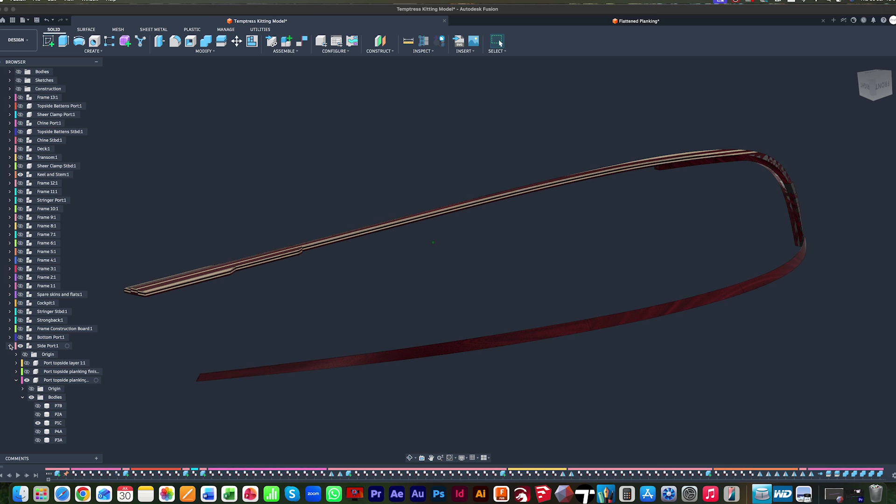We're going to be doing longitudinal planking down the hull sides. We're going to be doing some longitudinal planking on the bottom for the parts that are going to be visible when the waterline is painted. And then we're going to be doing diagonal mahogany planking for the rest of the bottom.

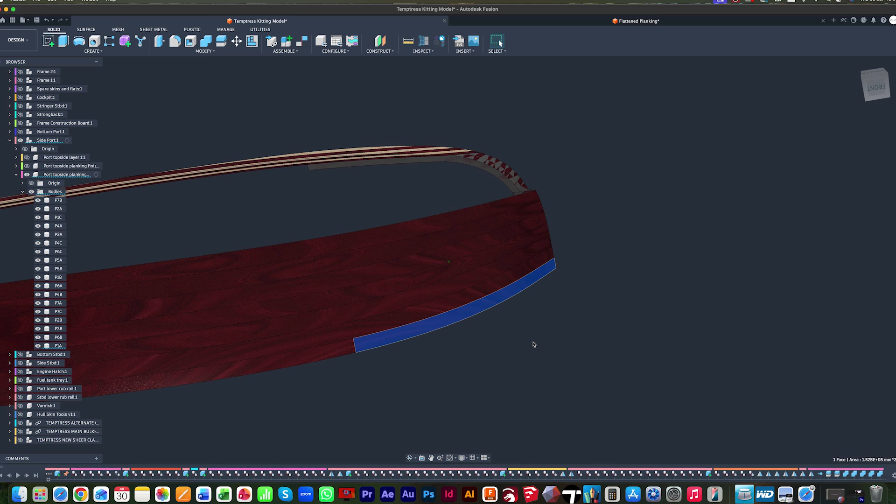Now I've got some ideas for how we can do this process a little bit differently to how you would normally do this. These planks would normally have to be manually patterned and laid out onto boards of stock, then cut to size, which is a very time-consuming process. Given that we have a complete 3D CAD model of this boat and we already have all of the plank arrangement modeled, we may as well utilize that information and try and refine things a little bit going forwards.

And after all, that is what this project is all about. I'm looking to find ways in which we can make modern wooden boat building more efficient. And you've already seen a lot of that rolled out with the pre-shaping of components such as the stem and the framing. So in this video, we're going to take a look at a slightly different way to approach the hull side planking by unwrapping those planks in CAD and forming flat patterns that should give us a pre-cut, ready-sized plank.

Now, I don't actually know how well this process is going to work. I've done unwrapped planks before, but not quite in a fine finished hull side planking like this boat is. So this may well result in quite a lot of wasted wood, but I'm all here for doing R&D and experimenting and trying to look at how things can change for wooden boats going forwards. So let's get into the process. Let's start cutting our first plank and I'll talk you through how I think it might work.

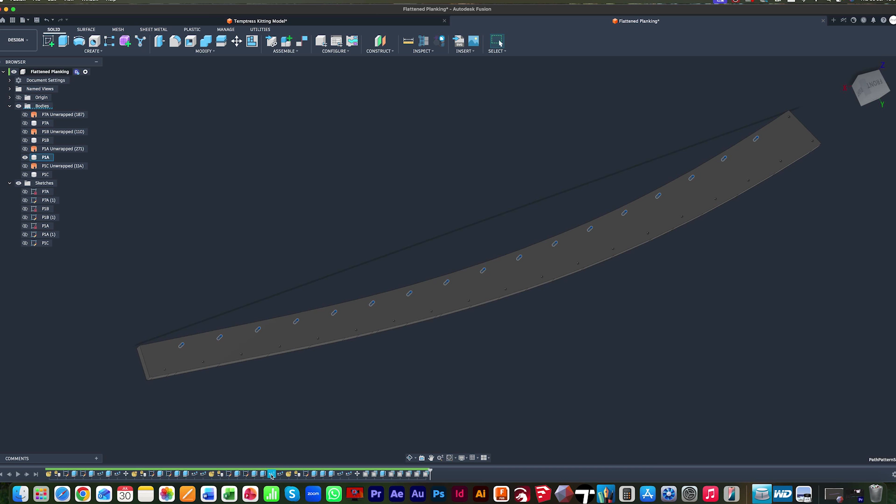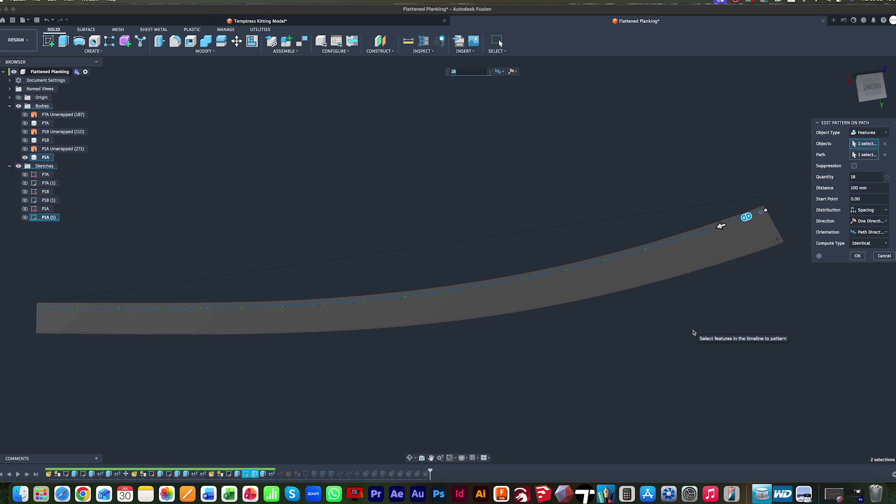If I edit this feature in the timeline, you can see that to place these holes we use a function called pattern on path. So that's going to allow us to repeat something, whether that's a part or a function, along a designated path. In this case, we drill one hole at the end of the plank and then we repeat that along the path, which you can see in blue here. And we create that path by doing an offset from the plank edge.

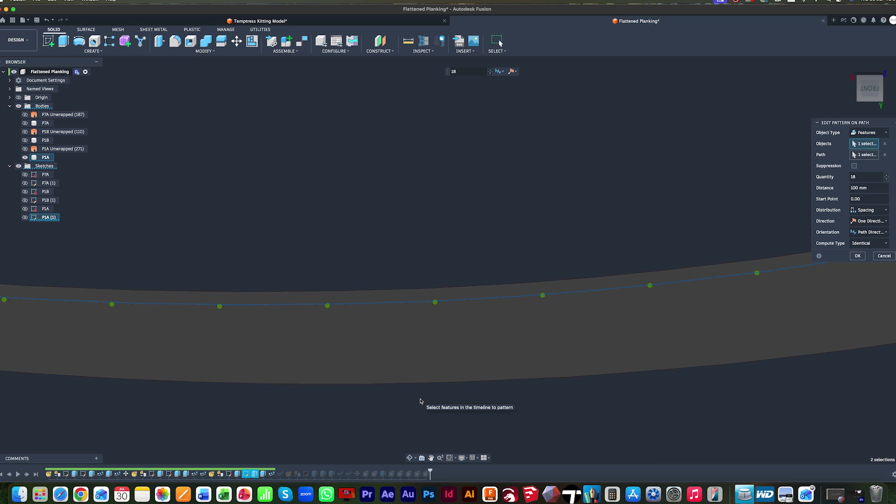Now, if we look at what it's done, you can see the holes in green and you can see the path in blue. It's actually not stuck to the path that it's used, which is very unusual for Fusion. It's normally pretty spot on for this. You can see it started on there and not followed it. So that is where the deviation of my holes has come from.

And I don't really know why that's happened. So I'm going to have to take a bit of a look into that. There are a couple of different ways I could approach this process, so I'll play around with that and I'll make sure that I check for that before we cut any more parts.

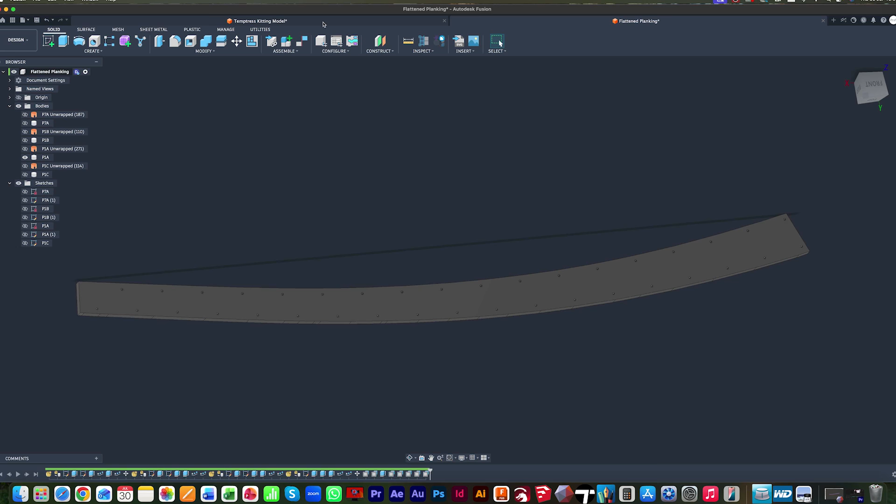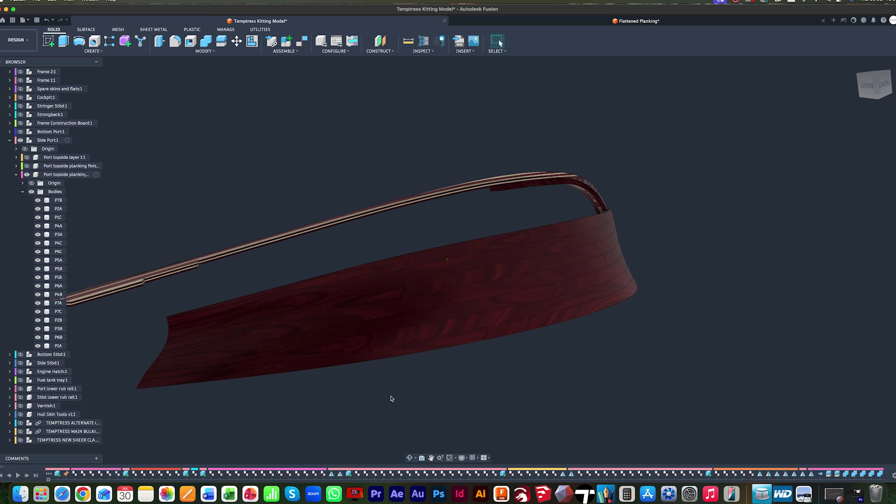Whilst I'm on the computer, I'll show you very quickly what I'm doing here. So I'll load up the Temptress model. Now you can see, I'll turn all the planking on so that you can see it. Okay, so that is our fully planked hull side, and you can see that these are all divided up into where the planks need to be, where the joins are, and what sort of shape they are. You can see the real twisty shape in some of these. So they would be a challenge to pattern manually.

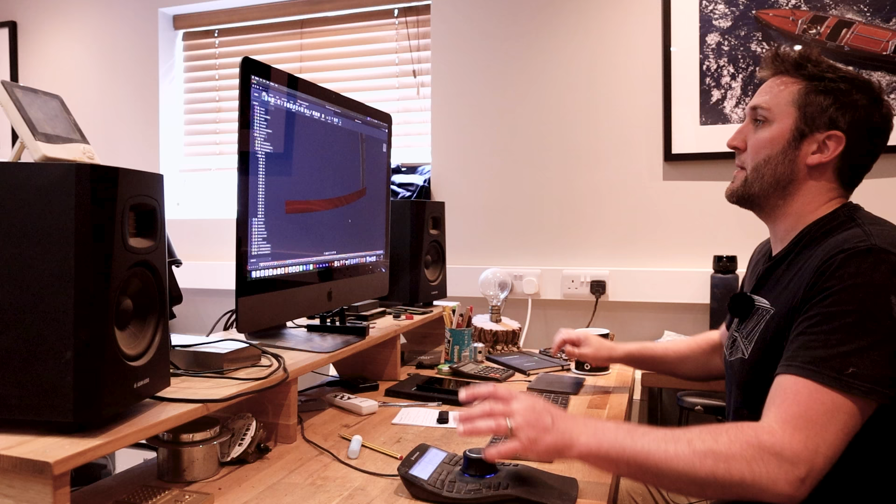So the plank I've just done is this one here, port 1A. And you can see that that's what we start with. So if I turn all the other stuff off, that is the plank that we want. Now to flatten that, I have to go into an external program. This isn't a function that Fusion currently has within it. So we export that plank, I flatten that out, and then we get over to what we have here.

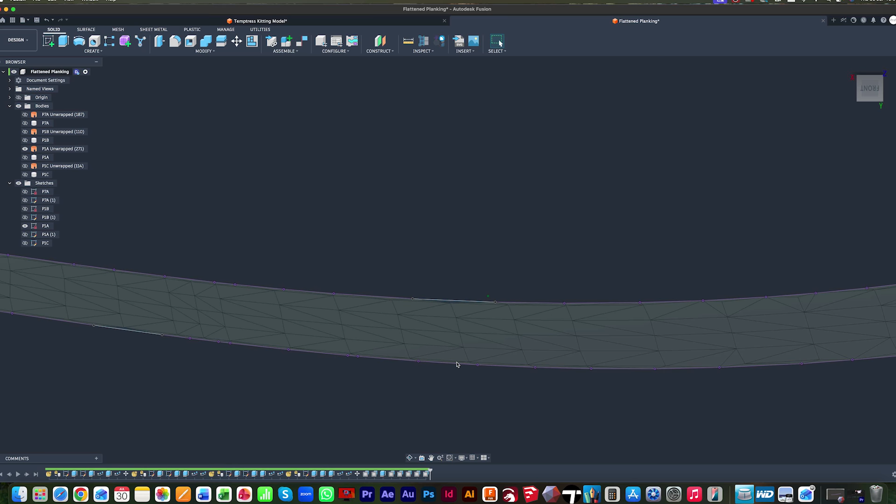So this originally comes in as just the outer skin of that plank, which is then flattened. And the accuracy to which this is done can vary depending on how severe that curvature and twist is. Now this is probably the most twisted plank, so it's the one that we're most likely to see errors on. And then what we do is we'll draw the outline of that. I'll take out any errors in the unwrapping. As you can see here, there's just a little tuck in. So I've just drawn a straight line through that to get rid of that little error, and we'll generally clean up the plank ends and things.

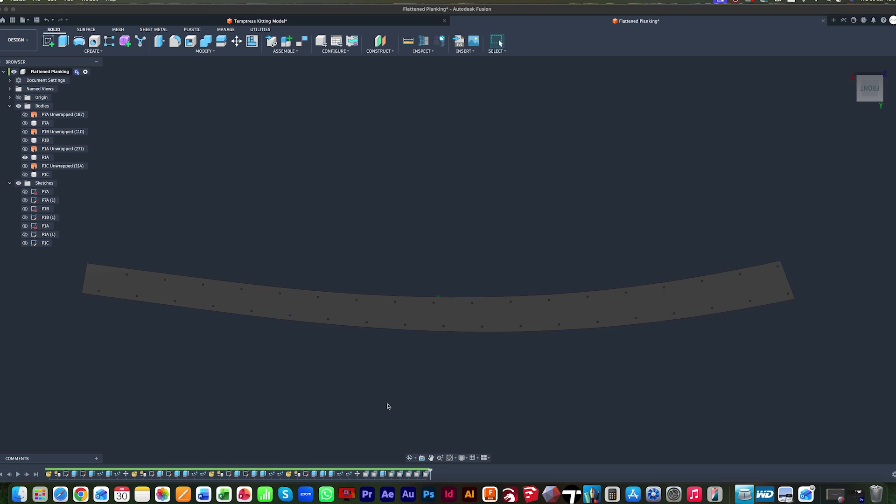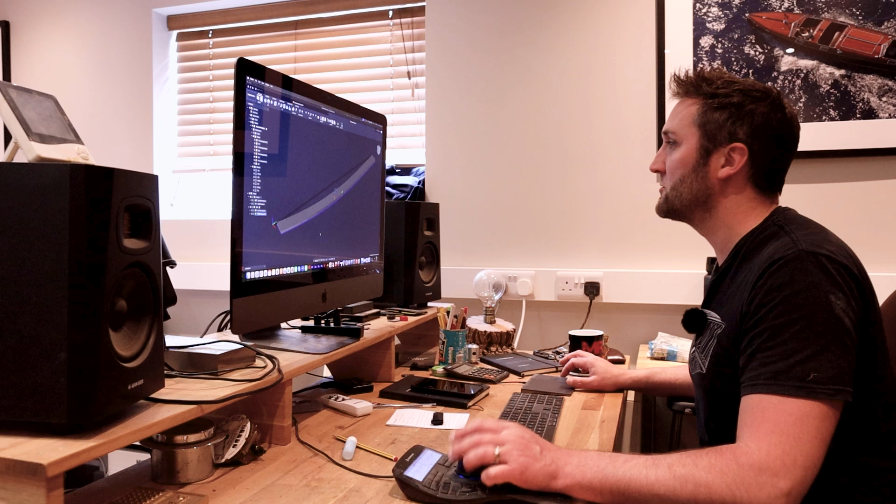Then what I'll do is the sketch that offsets that outer edge and allows me to formulate my rail for my holes. And then what I'll do is produce my finished plank, which is now a solid body. And then I can go over to manufacture and create the toolpath program, which will drill that and cut it out. So that's roughly how we get from the CAD model to a flattened plank. I've got to do that with every plank in the hull side and make sure that everything's correct.

Having those holes pre-drilled is going to save a lot of time with marking out, but it is going to be dependent on whether or not that gives me the visual look that I want. I may go over to just marking those with the machine and then drilling them manually, but it's all an experiment. We're finding what method works, so we'll play around with things and see how it goes. So I'm going to get that queued up, get the holes checked for the second plank. Let's cut another one, butt it up to that one on the boat and see how things look.

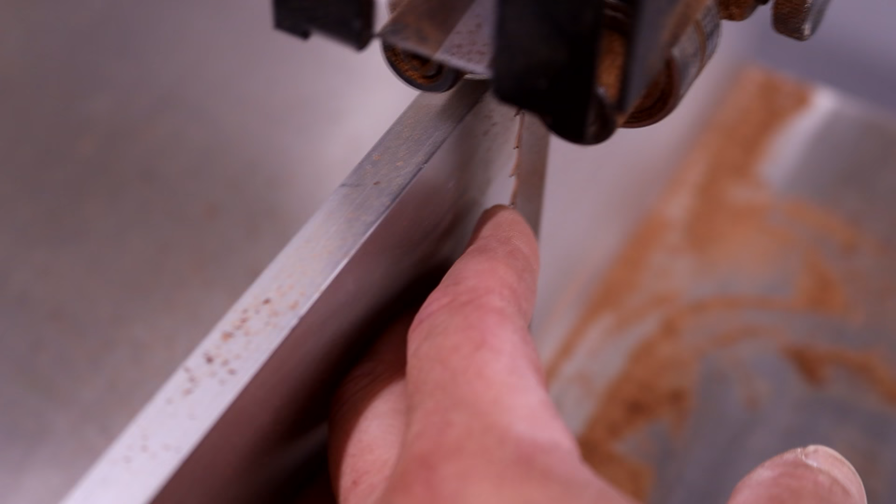I'm going to see if I've got enough thickness in this plank to cope with the kerf of the bandsaw blade. So the kerf is the width of the blade, which we're obviously wasting out the middle of the board. It's very thin on the bandsaw, especially with this blade I've got right now. So it's whether or not we can get 2 6mm planks out, but it's a bit of a balance really, because you get a better cut, therefore less waste when you clean up, but you've got a wider blade kerf in the interim.

So I'm going to try it on a bit of scrap, this here, see if we can end up with 2 6mm out of that. That would be a much more sustainable thing. I don't really want to be CNC cutting stuff and then ruining it at the resaw stage.

Okay, that's better. That gets me 7mm either side, a millimetre cleanup. It's pretty tight, but I'm confident that we'll get a much better cut with that. All consistency. So I'll just pop the new blade on the bandsaw to give me an extra fighting chance. It's not been changed in some time. And unfortunately, I'll have to cut that plank again, and we'll scrap that one.